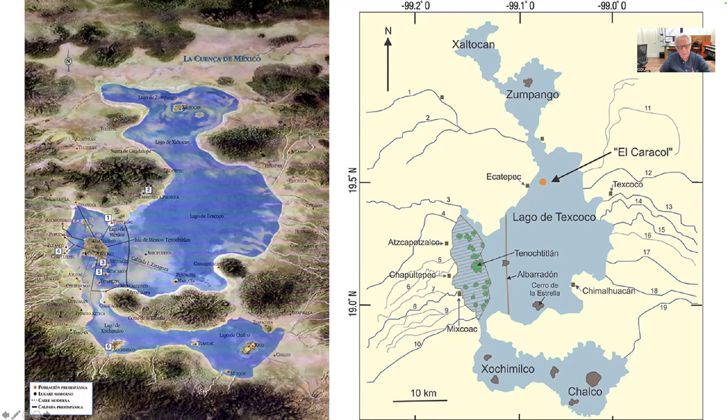The geological history of the basin of Mexico City is a volcanic process over 20 million years ago that created a closed basin, therefore creating a system of 5 lakes from north to south, and different lakes of different qualities of water. And Tenochtitlan was located here in this part of Lake Texcoco, as you can see, with other islands that created a metropolitan kind of system of small cities. But the main city was, of course, Tenochtitlan.

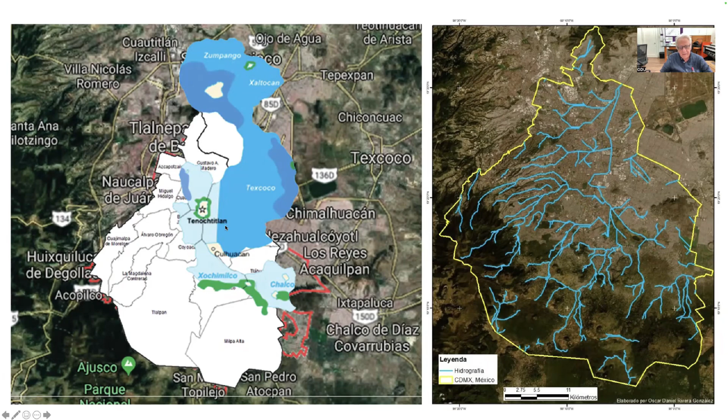This is the hydraulic map of the Mexico City basin. As you can see, all the water is coming from the mountains and creating these systems of lakes. Today, Mexico City and its metropolitan area is located on top of the lake, and therefore has problems of continuous flooding, which created many problems all the way from the 17th century

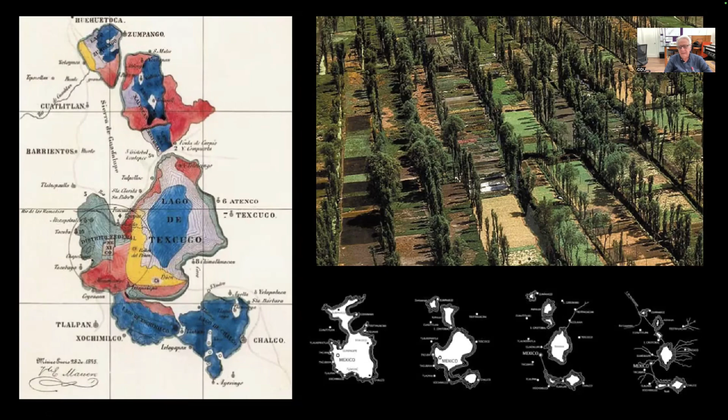to today. The solutions that were devised from the 17th and 18th centuries on were to desiccate the different lakes, and through channels and tunnels, take the water out of the valley through the mountains, therefore theoretically preventing the flooding of Mexico City. Of course, this was not possible.

The solution is an engineer-based solution of a deep drainage system that takes the rainwater out of the basin, out of the valley, and therefore, in theory, prevents the flooding of Mexico City. This system started in the 70s of the 20th century, and it took about 17 years to be constructed.

And very recently one of the final enormous tubes or pipes was excavated under the mountains in order to take the water out of the valley. As I say, an engineer-based concept which has created enormous problems for the city.

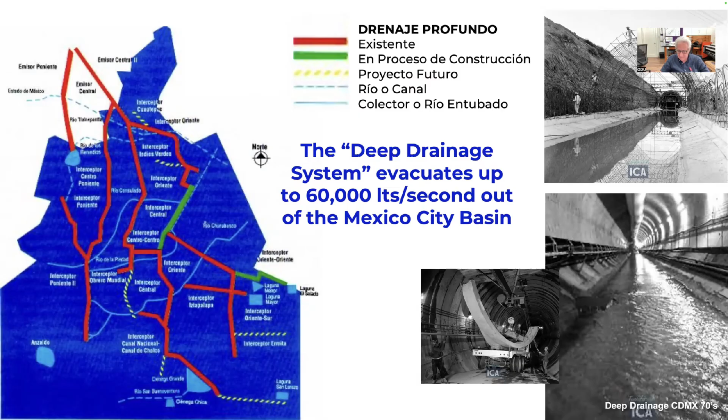That is a big problem because all the drainage system, all the infrastructure of pipes and so on that were designed and constructed during the late part of the 20th century are now against the levels that were originally designed. Around 2004, we were invited to participate in a project called Tecnoparque.

Tecnoparque is located in the north portion of Mexico City, on the border of Mexico City with the state of Mexico. It's the continuous metropolitan area, but basically this is the border. This site of about 14 hectares in total was originally a factory for the production of steel and rod. And this was closed around the 90s of the 20th century because of the air contamination of

the city. So in 2004, we were called to design a master plan to develop a project of offices related to call centers, data centers, and service centers for the metropolitan area of Mexico City. And we participated in this master plan and in the construction of the infrastructure of this development.

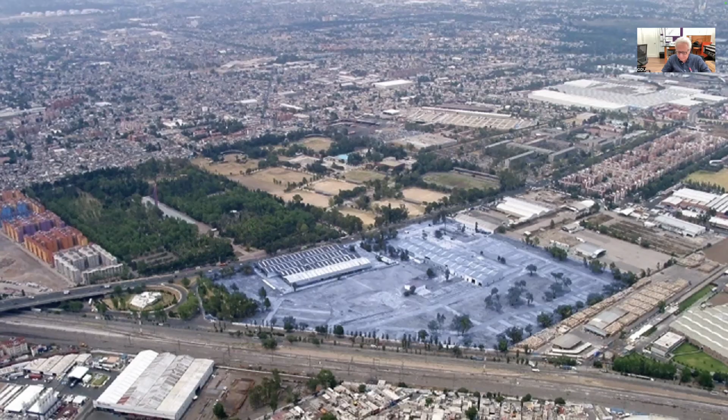The conditions to change the land use from industrial to offices, housing, or commerce were with the condition that the city would not give the site more potable water. They would only give potable water enough of what the industrial site was authorized, and the city forbid us to connect the rainwater and the black water, the drainage water of the development, to the municipality drainage system.

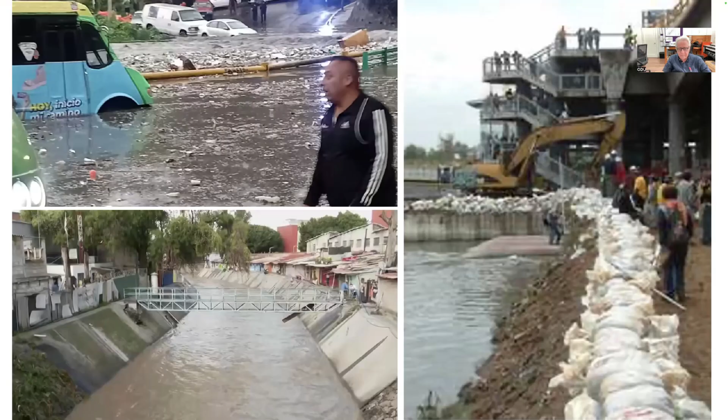So the whole system had to be resolved in situ on the site itself. How? Through infiltration and also recycling. Well, we can see here the Rio de los Remedios, which is the main channel for the evacuation of water in this district. And as you can see, it's completely saturated and it has overflowed many times. So that was why the city didn't allow this development to be connected to this river or channels.

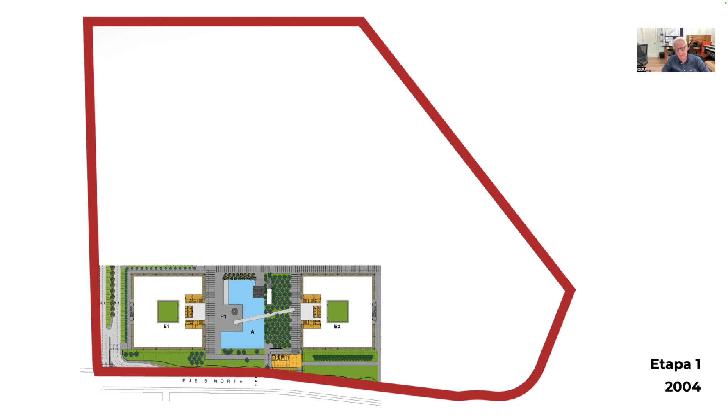So the project had to be developed by a process. So we did a master plan from 2004, and it took us about 10 to 12 years to develop the whole project altogether. This was the first stage in 2004, the second stage in 2010, and the third stage of the buildings in 2014, in 2018. In addition, a service area, a small commercial center was developed also on the site.

The creation was with a system of square buildings, and these buildings were to be resolved by the harvesting of water and infiltration of water into the aquifer in situ. So this is a zero outflow of torrential waters into the municipal system. This is the system today. It's finished. It's a very successful development in terms of offices and service centers, data centers, etc.

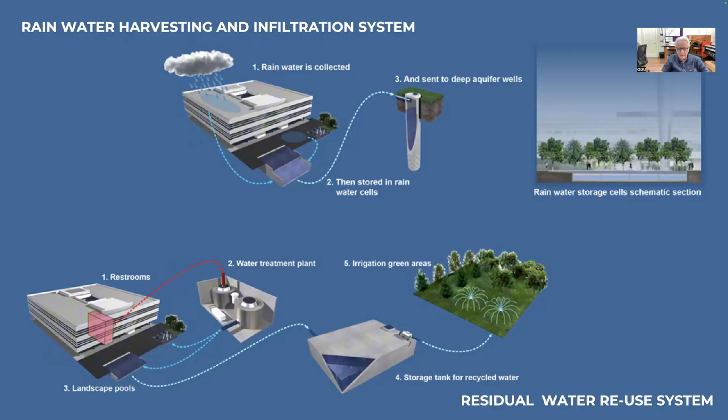Okay, well, how we worked on this process is to first capture the waters from the roofs, harvesting here, and then projecting the waters into rainwater cells, into cisterns here, and then projecting the water into deep water wells, more or less at 50 to 60 meters down into the ground at about the areas of absorption or infiltration.

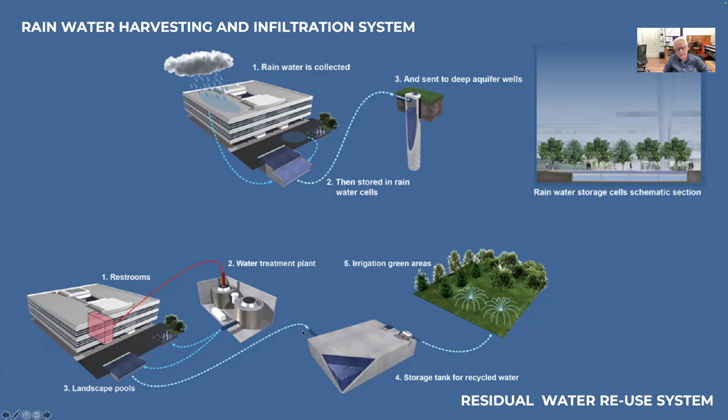The second system was to have water from all the restrooms and kitchens of the development go to water treatment plants, and then these were directed to water landscape pools for storage and recycled waters in order to have irrigation of the green areas of the site.

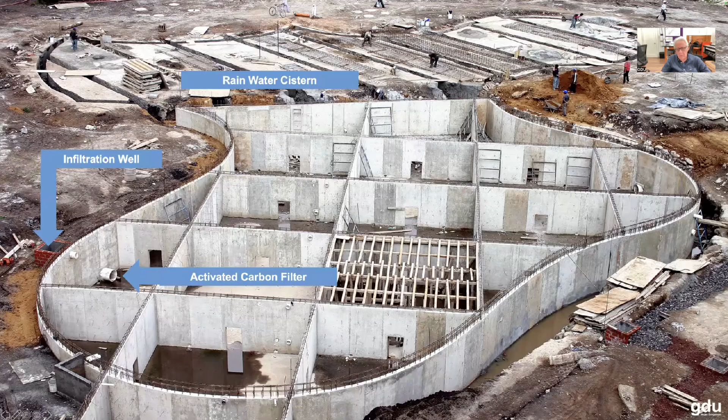So this is the system of cisterns, cells, capturing the water from the roofs and then putting it into a final cell with activated carbon filter, and then into the infiltration well down to 55 meters into the absorption of the aquifer. The cistern then was covered with concrete slabs, and then on top of that, the slab creates a water pool incorporating the treated water from the bathrooms and kitchens, then used for irrigation of the site.

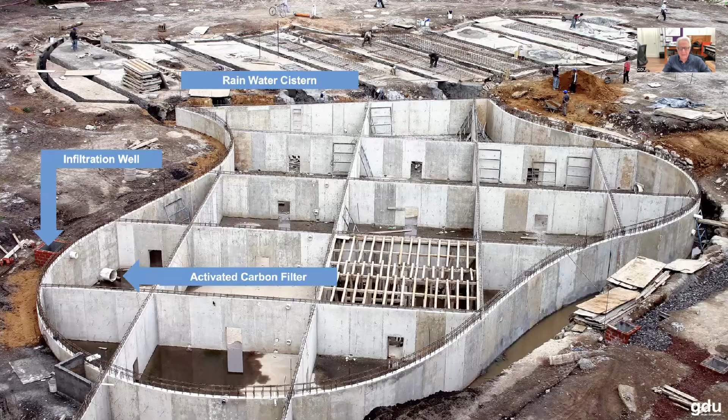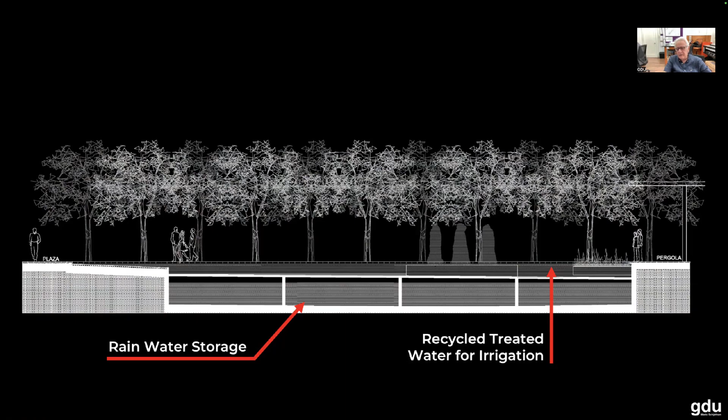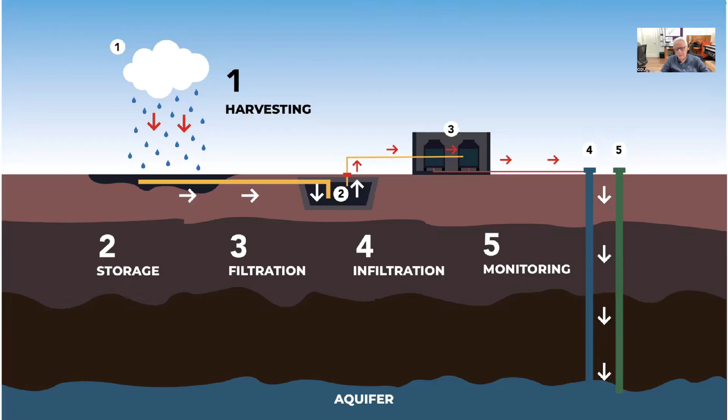Basically, the system is this: harvesting, then the cistern, filtration, and then infiltration into the aquifer, and we are able to infiltrate up to 90 liters per second in a storm in each of these wells. So we have 9 wells for the whole development, and we're injecting about 900 liters per second into the aquifer in a big storm, and then little by little the cisterns release the water into the aquifer.

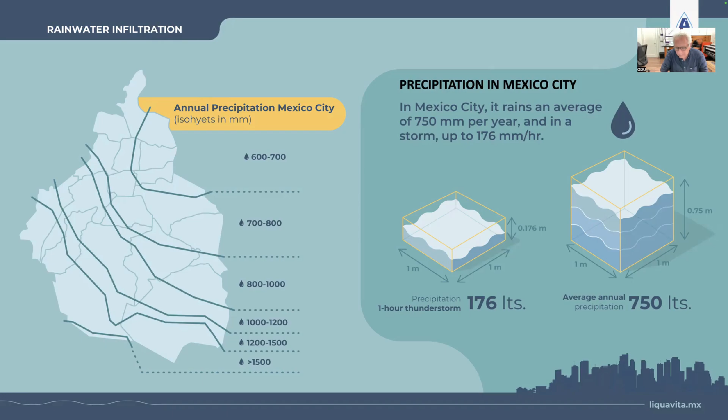So you can see here the average precipitation of Mexico City is 750 millimeters of water along the year. And we can have rainstorms in 1 hour of 176 liters per square meter in a big storm. So the storms come very strong during the summer. So where there's flooding, there's very little infiltration, and this is one of the main problems.

So again, looking at this, we are harvesting the water. We are infiltrating water first with natural small dams along the mountains, and then the artificial part: how do we do it by eco technologies like wells and so on to infiltrate in an artificial way down to the aquifer.

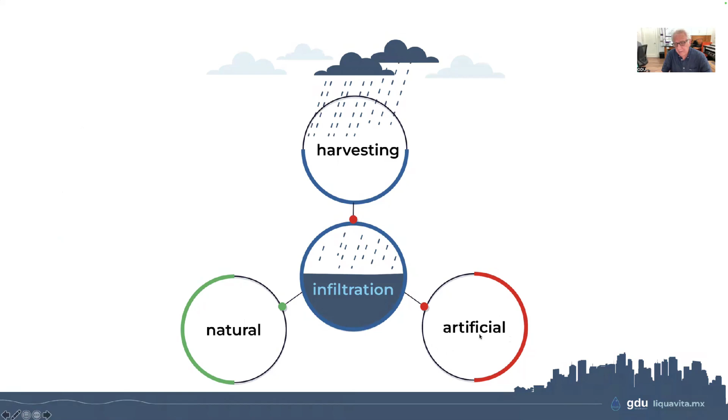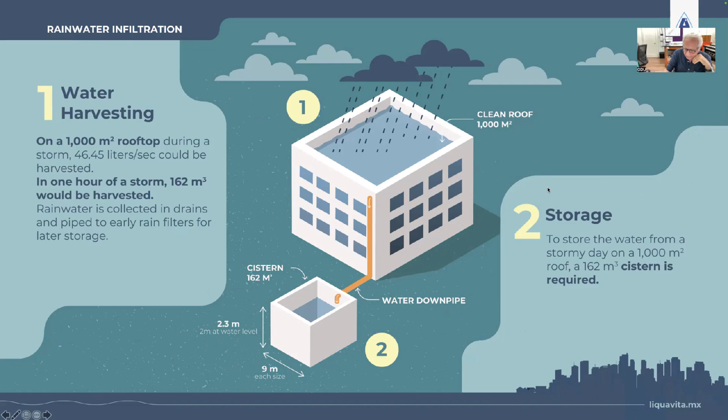So we have expanded the model, and the model is: if we have a clean roof of 1,000 square meters, then we can build a water downpipe to a cistern of 160 cubic meters, about 9 meters in size by 2 meters deep. And with this, a storm of 1 hour would be harvested. Or this is for a 24-hour storm, and then that would be a storage to release water little by little into the aquifer.

Then the third portion is the infiltration well. There's a cylindrical excavation and placement of pipe with perforations, and it's aimed for water harvesting infiltration in 24 hours. Drilling a diameter of 100 centimeters, we can construct a steel pipe of 60 centimeters. And we have found that in Mexico City's geology, we have two permeable strata, one at 50 meters down, and then another one at 80 meters down. So these are the possible areas to have infiltration into the aquifer.

These are the geologies, as you know. Of course, we were in a lake. These are clay soils, and then we have sand soils. But then this permeable stratum is composed of volcanic rock, and then it can infiltrate water into the aquifer.

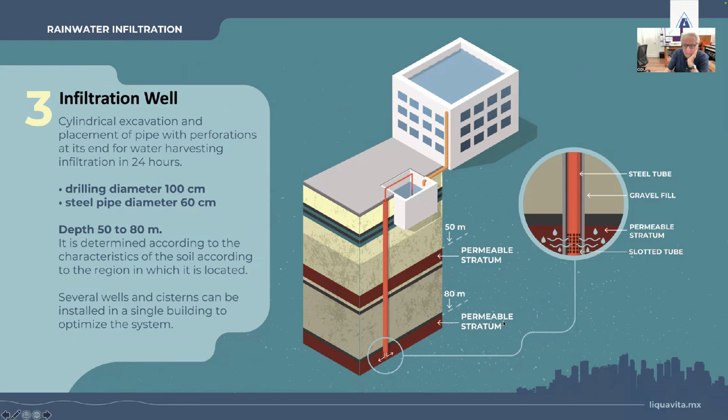What is very interesting of this process: all of this area, like I have said, is urbanized, and is the area which is the most problematic in terms of flooding. But it's also the area where we are extracting the water from the aquifers. So we do have to infiltrate the water, yes or yes.

So we have done a study that there could be 4 million square meters of flat roofs of over 1,000 square meters. If we extrapolate the model of Tecnoparque to 4 million square meters of flat roofs of over 1,000 square meters in Mexico City, we could be infiltrating as much water as we are extracting right now if we implement the system at the level of the urban area of Mexico City.